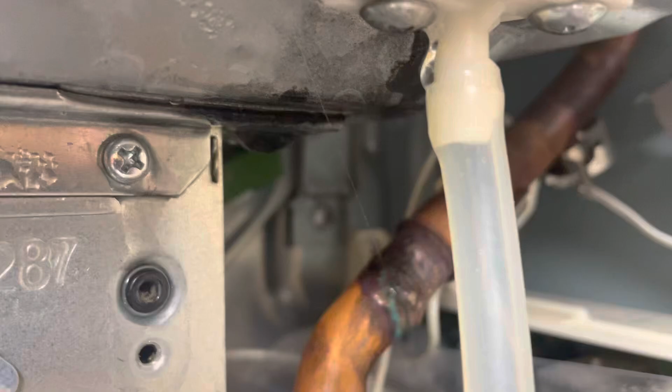Alright guys, we got a pinhole leak right here. She's shooting right out of that fitting that looks like it's been brazed shut once before. Got my finger on it right here, you see it? It's shooting right into the bottom of the heat exchanger there. No good.

Alright guys, as you can see on that Rinnai in there, we got a pinhole and it looks like it's leaked there before. So I'm going to try to braze it shut. And I'm going to see if I can either get that piece of copper, or if not, we'll have to get a new heat exchanger. We'll check to see what the warranty status is on it, but where it's been fixed once before, I'm about to attempt to braze it shut again.

Probably going to have to replace either that piece of copper. I haven't dug into it real deep. Maybe that's just a piece of copper, or it might be mechanically connected to the heat exchanger. We'll see, but we're going to try to fix it right now.

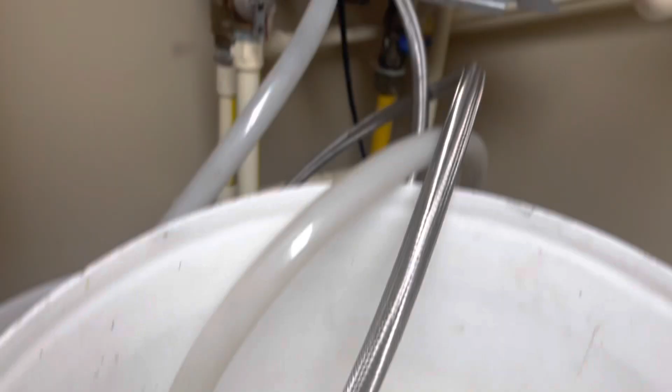All right, we're getting all the water drained out of it now to attempt to braze this shut. We want to make sure we have no water in the system, because if there's water, chances are the braze isn't going to hold. Now I'm just brazing a pinhole here over top of another braze, so probably not that big a deal, but I did want to make sure I got all the water out of it before I attempted the repair.

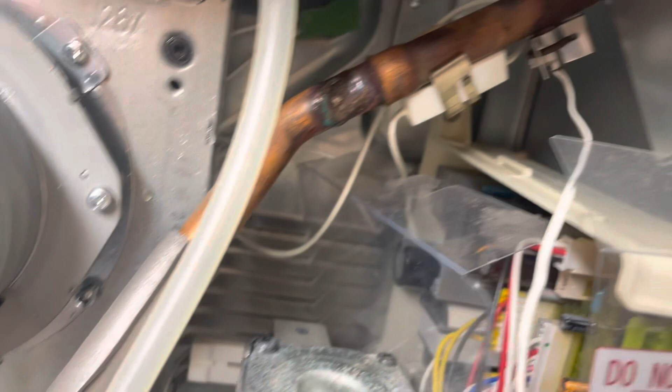All right, let's take a look at what we're up against here. Like I said, that has already been brazed once before. Could probably get just that fitting that goes into that swedge on the other side, right there. But chances are I'd probably get a whole heat exchanger. But man, this thing has been leaking all over everything inside here. So we're going to pull that off, try to get it drained, try to get all the water out of it before we attempt this braze.

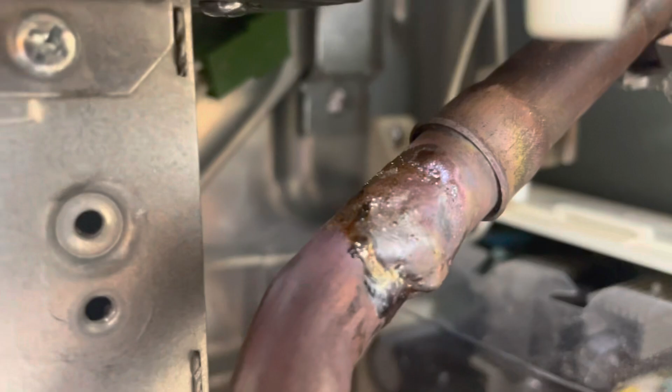All right, looks like crap, but we did get it brazed shut. However, that's just the tip of the iceberg. We got more issues here. Looks like that pinhole leak caused some other damage. It caused some big time damage.

All right, that Rinnai has multiple issues. I was able to stop the leak. I was able to braze shut that pinhole leak, but after I got that shut off and started testing the unit, the flow control valve is bad. So when I went to remove that, the cold water inlet valve broke off right in my hands because the brass was so brittle.

So I called Rinnai, and the heat exchanger still is under warranty, but apparently this unit has already had a heat exchanger in the past couple years. So now Rinnai wants a water sample. So I go to the customer with this, telling him, look, this is what it's going to be. And he, at this point, just wants a new water heater. And the water heater's only 6 years old.

But here's the funny thing. His old one only lasted 5 years. So he's definitely got a water issue here. And he has no water treatment system. No water softener, nothing like that. And I told him, you probably need to put one in. He could probably put a water treatment system in cheaper than he can put a water heater in.

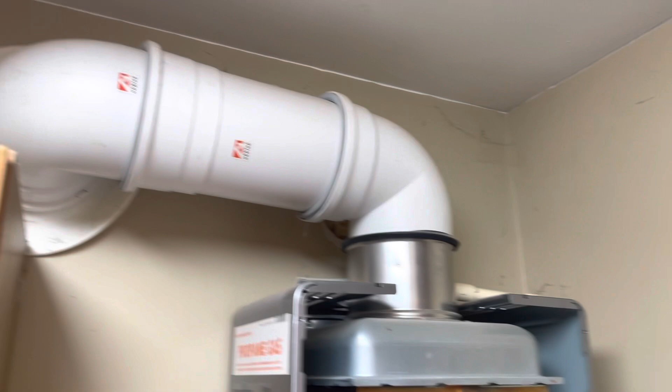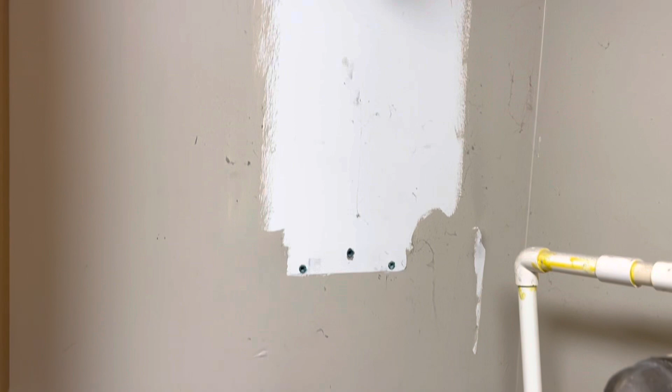All right, this bad boy's coming out of here. Our venting is gonna stay the same, and the CPVC is gonna stay the same, but I do have a new valve kit for it. And voila, it's off the wall, brought it outside. So let's go take a look at the new one and see what we got to do. Here's the old one. I got her ripped out of there. And here's our new one.

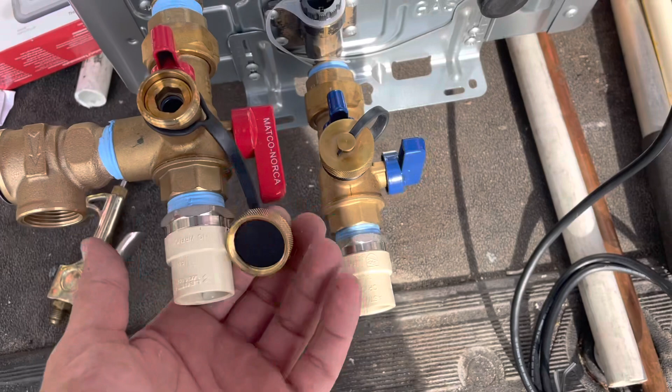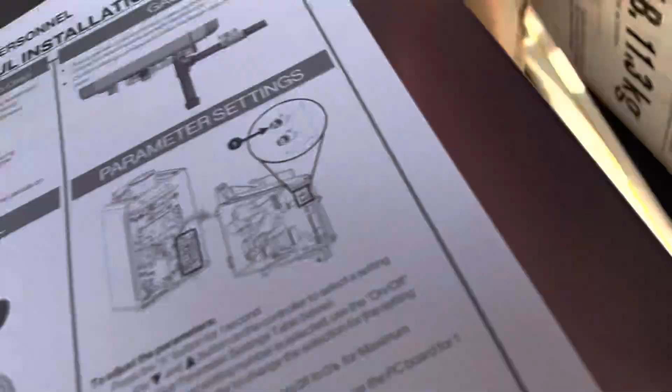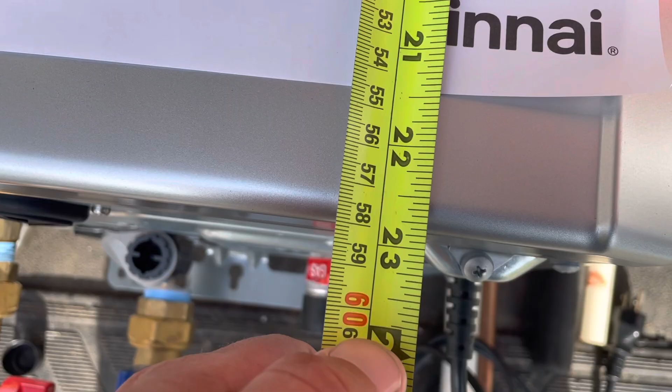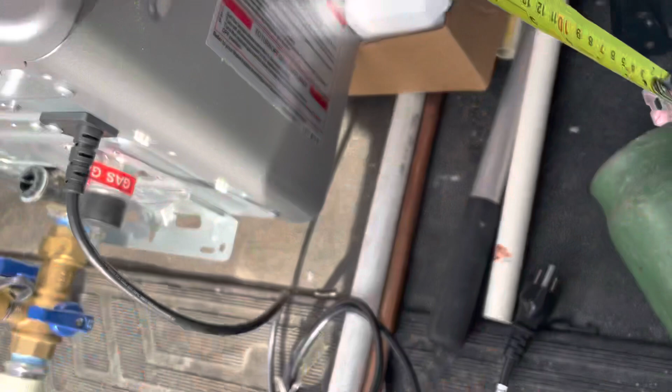I already took the liberty of putting the valve kit on. Saved me a couple minutes today. Did that last night. I think the new one is a little bit longer. I'm about to measure that now. Call that 22 and a half. No, it's the exact same height. Cool. It does look deeper though. Say 10 with no cover. Yeah, it is a little deeper, which that doesn't matter to me.

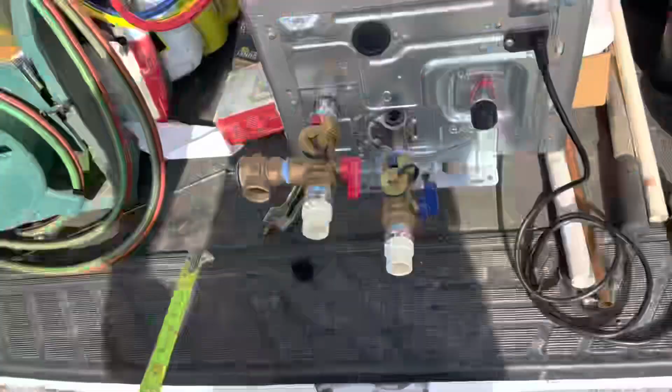Cool. All right, we're gonna carry this thing in there and get her put on. Now, I don't know if I did this carrying it in or it came like this, but that door is dented and I'm not very happy about that. But of course I don't have a new door on me, so I'm gonna lift it up and I'm gonna put it off to the side so it doesn't get damaged anymore.

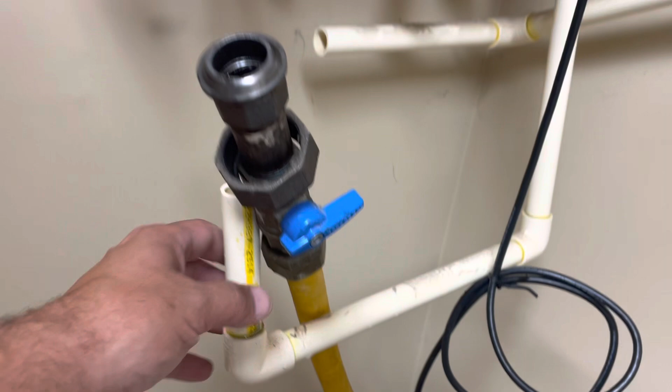Oh, we got our new one hung on the wall now. We got the venting hooked up. So we have our gas piping to do, and we have our water lines to do. So we'll go ahead and put this union on. Get that out of the way. And then we just have our water piping to do. And we're about to do that right now. All right, we got our water piping hooked up. We got the drip leg for our relief valve hooked up. Just double check the venting here. That looks good. All right.

All right, just letting my glue dry here. And then it's been about, I don't know, 30 minutes or so. I want to make sure this glue dries good and hard. I already got my gas on. I'm gonna soap test a couple of these fittings, make sure nothing's leaking. Yeah, we're looking pretty good. No leaks. All right, I'm just about to turn the water on. And we'll purge the water heater. All right, I've got full pressure on. Water heater's purged. We're gonna plug it in and go through our parameters.

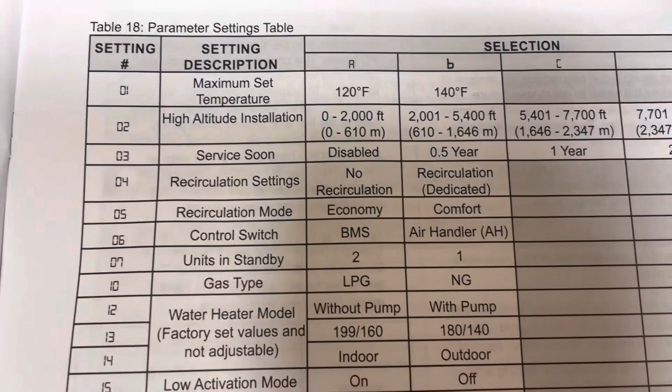All right, 01 max temperature. We can set that to 140, and then high altitude. I'm just gonna go through all these parameters now. All right, put the cover back on, got the parameters set. We're going to test the water heater. We're gonna turn this valve on here and make sure we're making hot water. And our little flame indicator light came on, so we're making hot water. It looks like we're running pretty good. We're gonna go around, we're gonna test a couple fixtures too, make sure we're good there. But I think we're in good shape.

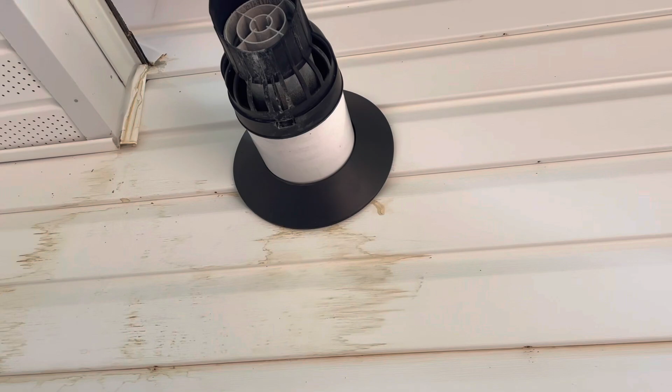Cut that back off. All right. Just wanted to check the venting out, make sure all that was good. All this was existing. I just reused it. Doesn't look bad. All right, just taking one last look here. We turn the temperature down to 120. Gave the homeowner some instructions on what to do, and we're done.

All right, guys, just finished up with that Rinnai change out. It took me about 2 hours between getting on the job till I pulled out of the driveway. I got there right around 8 o'clock, and it's just after 10 now, so pretty straightforward. The new one looked a little different, but all the fittings matched up perfectly. I just needed to do a couple CPVC fittings, and we were back in business. So, you know, pretty straightforward, pretty nice little job for a Saturday morning.